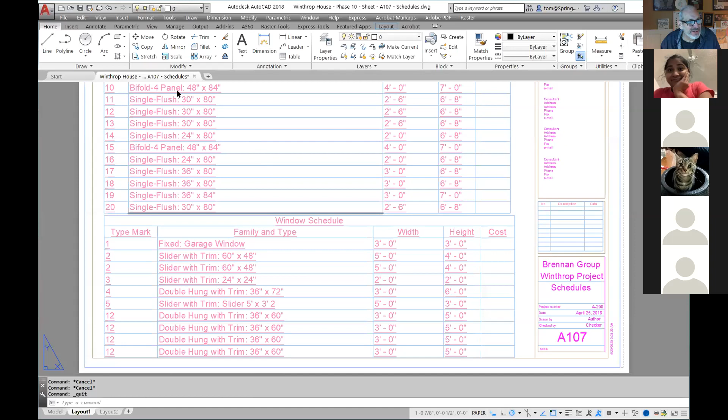Okay, all right, no. Okay, all right, go back to here, see what we got here. All right, so back out to here, see if I can't share the screen. And all right, I just closed AutoCAD, so I'm gonna have to open it all back up. So we're right back to where we started. All right, maybe we'll be able to open it from here. Let's try it again, file open.

All right, can you guys see this right now? Are you guys seeing this? You're sharing a screen right now. All right, okay. Ricky, can you see this right now? Yeah, I see the floor plan, the outside walls.

Okay, so let's just go over this real quickly here. So when you go into here, what's happening right now is you actually have what's called paper space. Paper space is identified by a couple things. First of all, you know you're in paper space. Now right here, this is your model, this is where we've been drawing everything, and over here is where you have your paper space elements. Now your paper space—Right, I was able to get that far. Right.

Okay, so as you work with this, right here it says 'paper' - that's how you know you're in paper space. When you're in paper space, that's where you put your title block information and anything that would actually be printed on a sheet of paper. This triangle right here is the other indicator that you're in paper space.

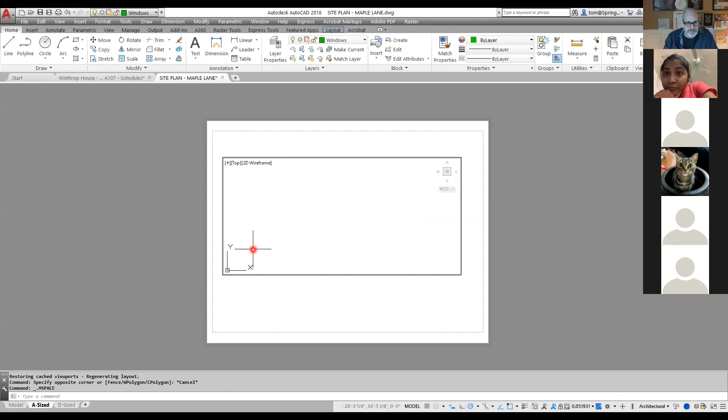Now, if I double click inside of here, I'm now in what we call model space, and it says 'model' right here. So now if I double click my wheel, it zooms in, because once I'm inside of here, I can just zoom it. I just double clicked my wheel and zoomed to extents, and I can continue to zoom inside of here. So all you have to do is just zoom it.

So you're saying once I get this blank paper here with the square, I double click the wheel, and it should put my drawing in there? Well, two things here - first of all, this is paper space out here. So what you're doing is you're going to put your title block on there, and to do that, you insert it.

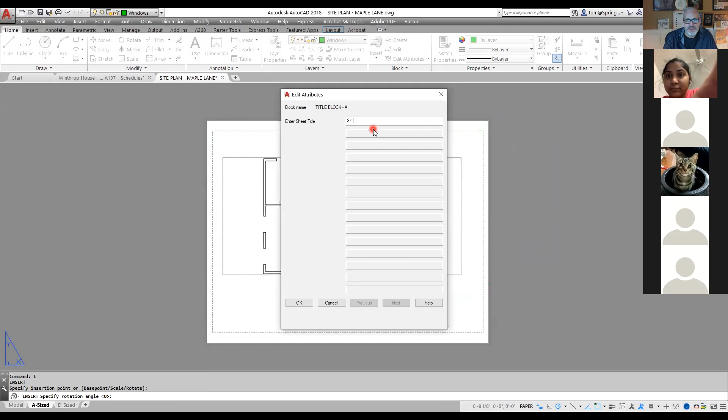So we go to insert - all this is on the video - we go to insert, and I go to title block A, hit OK, and bring this in. This is the title block, this is the information about what we just drew. So I typed in S-1, that is what that is, and it shows up right down there. So that is how a title block works with attributes.

So you got that. Now, if your information is not showing - in other words, if it's looking like this - you just double click inside of it with your wheel, and it's going to zoom you out to extents, and then you double click over here. So it's still there - if it's out here in the model, it's available on here. So that's all you have to do. Does that make sense?

I can try, yeah, just double clicking on the wheel and see if it puts it in there. Yep, yeah, you've got to make sure you're inside.

Now again, please watch what I'm doing here - okay, you can do this. If it says 'paper,' that means you're not inside of here, that means you're out here. If you double click inside here, now you're in the model - this tells you you're in the model. Once you're in the model, you just zoom to extents, you can zoom and pan inside of there. You see how that's different? So it's inside of there, and then you double click outside to go back. So you've got paper space and you've got model space.

All right, so give that a shot - if it's not there, I'll be able to double click and find it. Okay, all right, I'll try after class to see if I can get it. Yeah, yeah, that sounds good.

Okay, so what we did last week is we worked on this right here, and that worked out well. And so what we're going to work on next is going to be... let's see here. So we've got that there. Now that we have that, that gives us a basic idea.

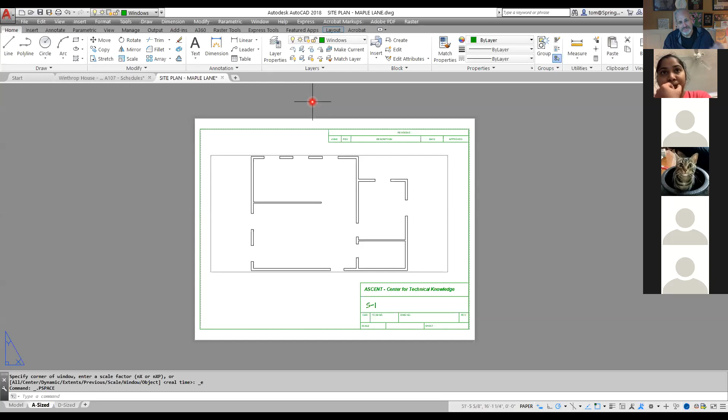Sometimes when we put the last block, which is the blue one, the scale - I have a problem with the scale because it shows so small. I tried not to make it bigger, but I couldn't do it. So we're talking about on the D size over here? Yeah, the blue one.

All right, then what you probably did, just guessing right now, is you inserted maybe this other title block. You got a title block A, a title block D, and these other small ones. So what you might have done is this. Is that what you maybe did? Or was it even smaller than that? Smaller than that, it's so small.

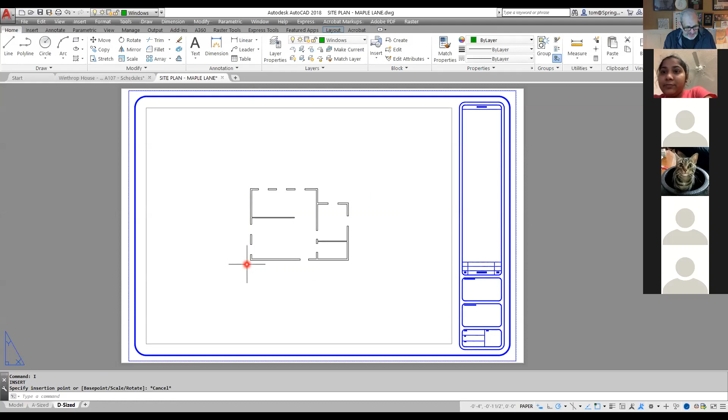Okay, well, without seeing it, I can't really tell. I just put the scale on and submitted it, maybe it was wrong a little bit. Just by what you're describing, I don't really understand what you're saying there. But I'd recommend going back over the video, which you probably already did. It looked like not too many people went into the videos. But if you went through it, it should explain exactly what you need to do.

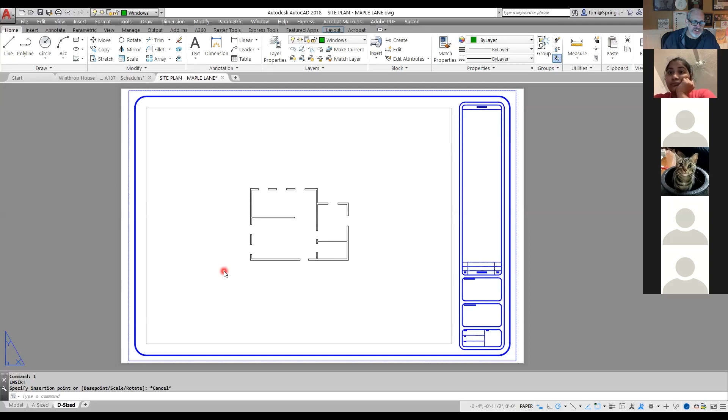Okay, so anyway, that's how these work right here. So when you're working and going to print something, this is how it works in AutoCAD. You've got your paper space environment, which is where you put your title block. And then inside here, this is your model space, which is where you see your information right there. So you've got those things.

And then we talked about actually making attributes and so forth, which I went over last week, which I'm not going to do right now, but that was the whole lesson of last week. So anyway, we will move on from there.

Any other questions? Oh, that one, just because I can't see your screen and it's really small, I don't really know. Are you saying that the title block itself is small, the blue is small, or the image inside of it is small? The blue title, like when I'm trying to insert the title.

Okay, so it'd be small, and then I got to scale it so I make it as big as that one. All right, it should come in at just its normal size. It doesn't come in at normal size on mine.

Yeah. Okay, I got a question, Mr. Brennan. Yeah.

What I'm looking at right now, after you get your text in here, is this going to save to that window? When you click on insert, it should show up in there, right? I'm just kind of wondering when I can upload this to make sure that I've completed the assignment. Okay, well, here's what you should have done.

This, and I don't have this completed, it should look like this when you're done, okay. And going over the sheet that I had, what you were supposed to do is this. Okay, this is what it's going to look like. First of all, we talked about having the thing.

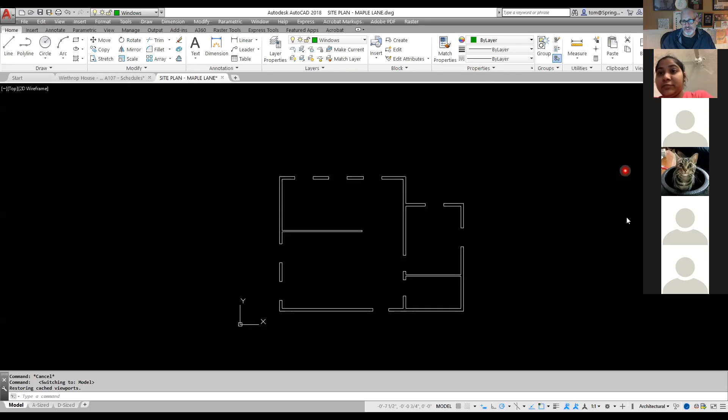Well, what we're going to do is what my goal last week was, to give you an introduction to what actually is happening when you work with title blocks. It looks like I didn't get that idea across very well, so I apologize for that. The last thing I want to do is make this confusing, especially with everything else going on right now.

Anyway, the goal was to create this sheet, and then when you see the title blocks, just go ahead and insert them and put information in them. It should have been pretty easy. I might have done too much, I might have tried to force you guys too much, I may have made a presumption upon your abilities. I didn't mean to do that.

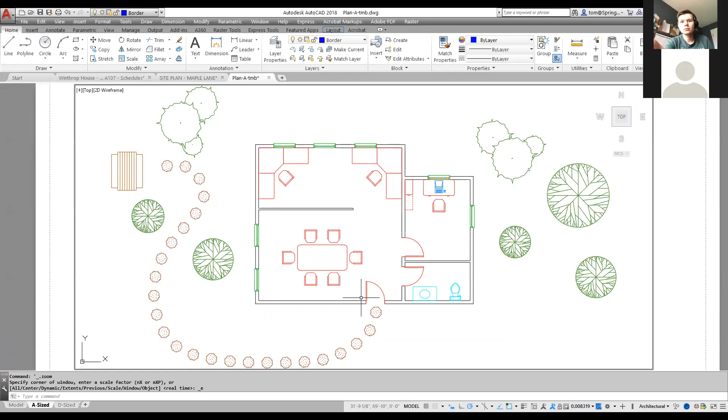Okay, but going back to here, can you guys see this right here? Yes. Okay, so this is what the drawing looked like. Then when I went to A size right here, if I go to here, now watch this. If this is really small, I double click inside here and double click my wheel, and basically it's going to zoom out.

So here, this is where you go back and forth between paper space. Right now, I'm in paper space. It says paper. Okay, let me ask you guys a question. Am I in paper space right now, or am I in model space? Paper. I'm in paper. That's right.

Right now, I double click here. Am I in paper space, or am I in model space? Model. Right. So in model, I double click inside here and it zooms me out, and I go back to paper. Now, at this point, I'm going to insert the title block that we talked about.

So I'm going to go to here, and grab this title block here. This is just going to be title block A, the one I provided for you guys. I'm going to drop it down here. So this is all you had to do: drop this, put it in there. It's going to ask you for sheet number, S-I, S-1, hit open, hit OK, boom, there you are.

So you got that right there. So that's what you have. That part was just something I kind of gave you to show you.

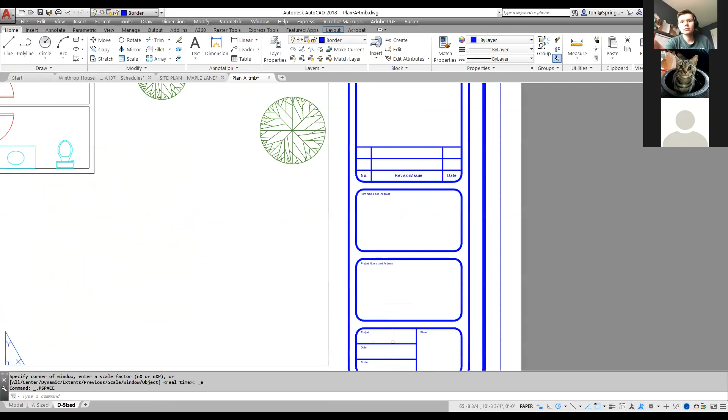Now, this D-size one, you're going to go here, and here we have the same issue. So we double click inside here, we double click our wheel, and then you see the information. Now over here, what we're missing right now is title block information. So we talked about how to make the title block.

I'm sorry. Do you have a question? We lost them. Okay, all right.

Okay, so right now what we got right here is I'm going to show you guys what we did. What we did is we made attributes. Now, to go over this again, to make attributes, you've got these different attributes right here.

But anyway, I'm going to go ahead and do this for you guys. So I go to here, we go back up here. We went to insert, and then we went to define attributes. So when you go to define attributes, I'm just going to go here and go sheet underscore number. And then the prompt is going to say sheet number. And then I hit okay, and I drop it down here.

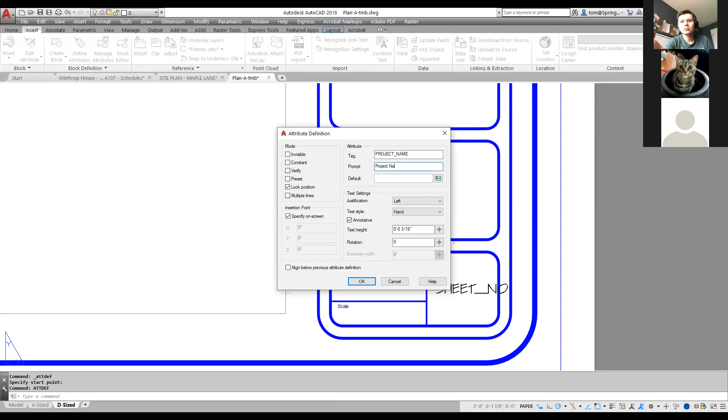So then I make another one. I right click, I go to repeat that. And this next one is actually going to be called, what's the next one? Project number? I think it's project name. Yeah, project name, okay, project underscore name. All right, thank you. And then I go to here and project name. Okay, and this is how we actually do things in the real world.

This is something that, if you get the hang of it, I don't think will be too hard for you guys. I know you've got other commitments, but if you just spend 15 or 20 minutes with this, it'll be very clear. It's not hard, you can figure this out. So what you're doing is basically supplying intelligence onto here.

Now I'm going to do the date. The date's going to look like this. I'll go to attribute definition again, and this one's going to be date. I'm going to make it capitalized, date, like that, and the prompt is going to say date. I hit OK, and I drop it in the date box. This is how you actually make title blocks.

If you know how to do this, life's going to be a lot easier for you. We'll do one more, and this one's going to say scale. So it's going to be scale, and then we go to the prompt and type S-C-A-L-E. I hit OK, and we drop it down here, boom, boom, boom, like that.

Okay, so now that I've got that, I'm going to save this all as a block. I type in B for block, and I'm going to save it as a block. What did I call it before?

I called it, oh, I don't know. I think I called it like D size title block. D, what did I call it? D? Okay, D, title block. What's that? Title block D. Thank you. Title block D. Yes, sir, okay, thank you so much.

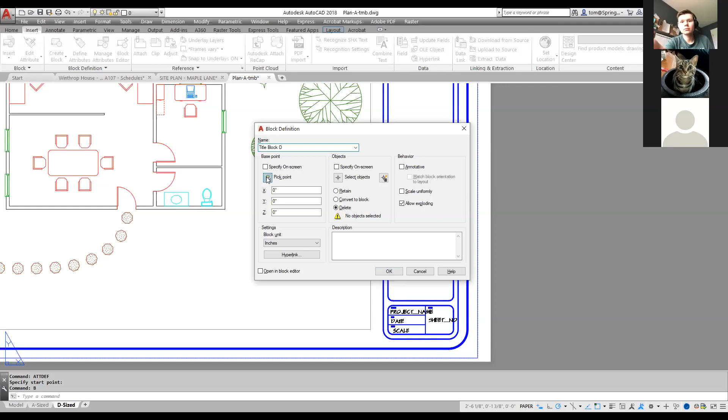Okay, and now I pick a point out here to grab everything, and it's going to be my lower left corner, like that. Then I'm going to go ahead and select my objects, which is going to be everything. Then I want to pick these in order: 1, 2, 3, 4. Hit my enter key.

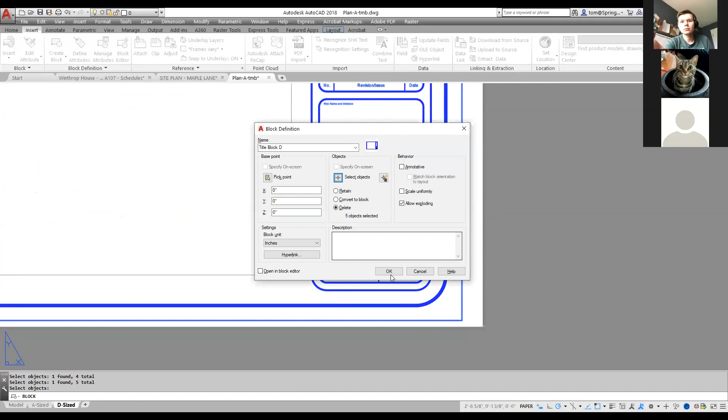I'm just going to go ahead and let that delete, and it goes ahead and does that. Now once it's done that, I'm going to insert it, just making sure I got the border to make it a little easier. I go to insert and I'm going to put in title block D. I hit OK, I bring it in, and I drop it right there. Then it asks me for the sheet number.

For the sheet number, I think I called it what, S1? Yes, S1, okay, thank you. Trying to remember what I did last week. Okay, S1, we'll go back down to here for sheet number, we'll put S1. And then the project name.

Site plan. And then the date is going to be, let's see, date is going to be 4/22... actually it's got to be 4/2020. And then scale, let's see what I said the scale was. I said 1/4 inch equals a foot, so I made 1/4 inch equal 1 foot. Okay, so I got that.

So once I've done that, boom, that is what your title block looks like, and that is what I wanted you guys to save and submit. That's all I wanted you guys to do. Now over here, inside here, you could also scale this, so it's also 1/4 inch equals a foot. When you've got that, it fits nicely and then you're good to go.

That is what you do. Those are the steps right there for putting together a title block, because we're going to be using this when we actually do our final submission. I just wanted to give you an introduction to title blocks, so that's kind of review. Now that we've done that, are there any other questions? I want to make sure it's clear. I realize we went through quite a bit last week, but the whole goal is just to understand how to get a title block into your drawing, how to deal with attributes, and how to make some attributes.

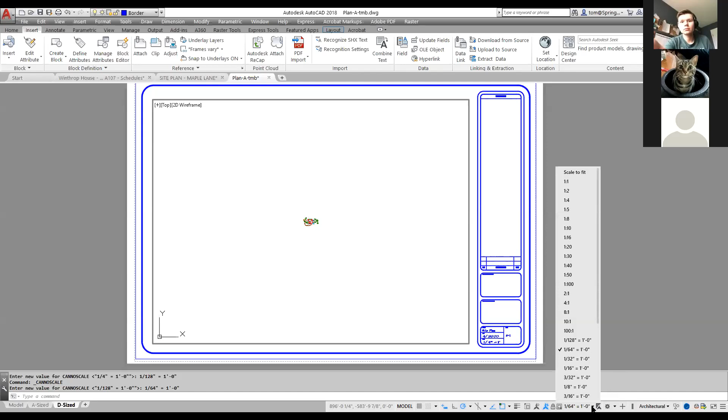Now check this out, Raphael, this is 1/64 inch equals a foot. It says so down here. So what you have to figure out is what looks best. If I use this scale, 1/128 of an inch, would you want to use that? No. Okay, would you want to use that? Yes. You'd want to use that? No, I wouldn't. If you handed that to a customer, would they want that? No. However, if I do this, I'm getting closer, I'm getting warmer. And then if I find the sweet spot, 1/4 inch, it's like, oh hey, that's looking great. And if I say I want to go a little bit bigger, see if it'll fit, well now look at that. That's a little too much because now I'm losing my information.

So I back it off, and the sweet spot is 1/4 inch. So the answer is trial and error. You're just going to work with the scale until you find the maximum size that will fit on your sheet that contains all the information you want. Does that make sense? That makes sense.

Now here's the other thing. Let's say I didn't really care about the trees. In that case, I could say I don't care about the trees, I'm just going to make it 3/8 of an inch, that's all I really care about. And then I could go here and say, turn off the stupid trees, I don't care. And then at that point, I can go over here and scale and move it over a little bit. So that's another approach. Now I'm showing more information scaled larger, I'm just not showing the trees. Does that make sense? Yes.

So that is the answer. The answer is you, as the tech, have to look at it and say, what does the customer have to see? And then you basically refine your information by layers and so forth. When you get it to the way you want it to be, then you maximize it so it fits on the sheet as large as you possibly can, so it gives them everything they want. Does that make sense? Yes. Okay, Mr. Brian?

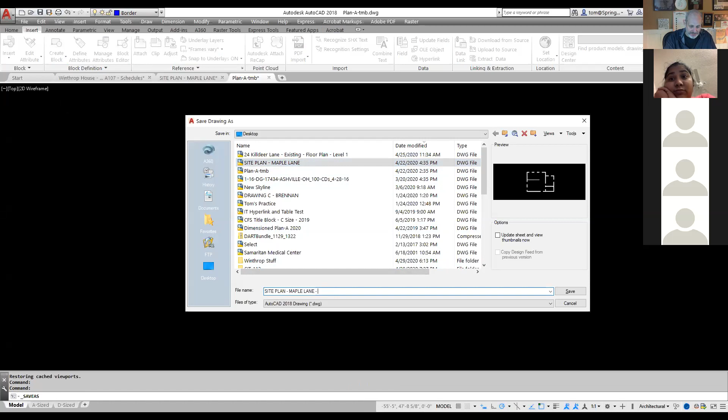I'm just going to go to the desktop. I've already got it here: Site Plan Maple Lane dash Brennan. How's that for a nice suburban name? So you've got Site Plan Maple Lane, and that's all you submit. Then when you submit it, I'll open this up and I'll know what you did.

See, it seems to me like, how are the two connected? Like they would have to be uploaded separately. No, it's all one model. It's all one thing. The model's here, and these are just layouts. These are representations for printing, like print previews.

Okay, so when I submit the drawing, those are going to be within the file? Yeah, you just gotta pull them up. Once they're in there, they're attached, so you can't get one without the other. If I get the drawing, I get the layouts too. All right, thank you.

Good, good questions, you guys are asking great questions. I obviously missed some things last week. Are there any other questions about this here?

No, I just got different questions. Is that the last class for us with you? I'm sorry, what? Is that the last class we're taking this week? He's asking if this is our last class today. Oh no, it's not, actually. I've got the schedule right here in front of me. Are you having the last class in any of your other classes? I do have 5 classes. I'm taking 5 classes this semester. Oh, 5 classes, okay. No, this is not the last class.

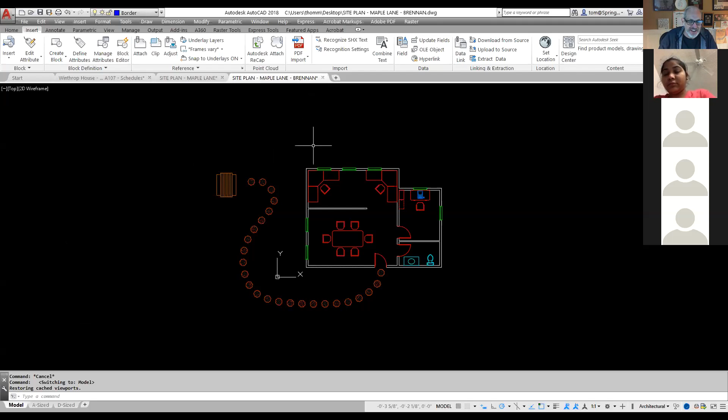What I want to do is, I don't want to grade 4 different elevations, so I'm going to show you guys how to combine your elevation drawings. We talked about the elevation drawings, and I'm going to go ahead and change my screen out here.

Let me do this real quickly. I'm going to stop sharing this for a minute, I need to grab something here, so I'll be right back. I got to just grab some other items here. I really need to do a better job of keeping my stuff more organized, but I'm doing the best I can.

All right, so we got this stuff here, and what we did, let's see, what do we got? All right, up to here, got this stuff here. All right, my goodness, that's not looking so good. All right, so what I need is the most recent custom garage project, let me find that. All right, see if I've got that here. Custom garage, there it is.

Yeah, all right, so the custom garage, we made the elevations. Let me find those real quickly here, just take me a second, there's a lot of content out here. All right, let's see. Okay, through 2020, and I don't see the custom garage. Let's take another look out there. Custom garage, is it on? Okay, so we're gonna do this.

We'll search out on the D drive. All right, let's just take a second. If I could, I would. Oh, there's the stuff I did for University of Connecticut. Yeah, one of my customers some years ago was University of Connecticut, I did a bunch of things for them too, facilities type stuff. So just looking for this right now. Yeah, just got to find this stuff for you guys here, it'll just take a second.

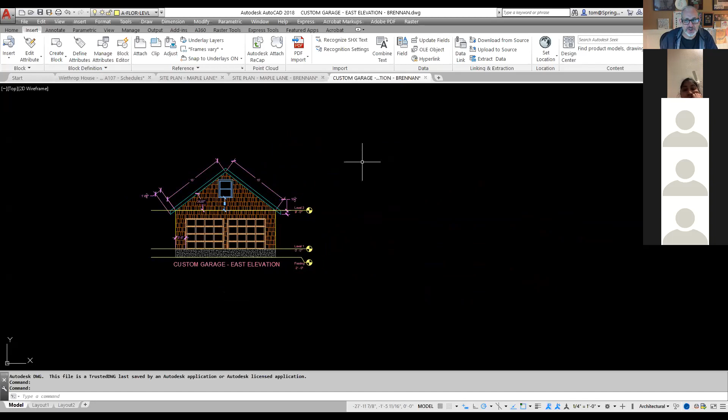Okay, what I'm going to have you guys do is this. Now, what I want you to do is put all these drawings into the same location, so that means this. You may want to jot this down, because I'm just going to explain how this works. You're going to open the east elevation, which is here, a drawing you already did. Now once you've done that, we're going to insert the other views into it, we're going to insert the other elevations into it. So let me show you how that works.

So to insert them, you can just type the letter I on your keyboard, and that brings up the insert command. We go to insert, now what I'm going to do is browse. When I browse out here, I want to find my other elevations. So the first thing I'm going to look for is my north or my south. So out here, I've got this custom garage stuff out here.

Should be here anyway, come on you, where's my custom garage stuff? Okay, don't see it, so let's see if it's somewhere else. All right, where is my custom garage stuff? All right.

Okay, not seeing it. Maybe it's in here. Okay, there it is, custom garage. So I got custom garage. Now what I got here is I got the east elevation. I've already got that in here.

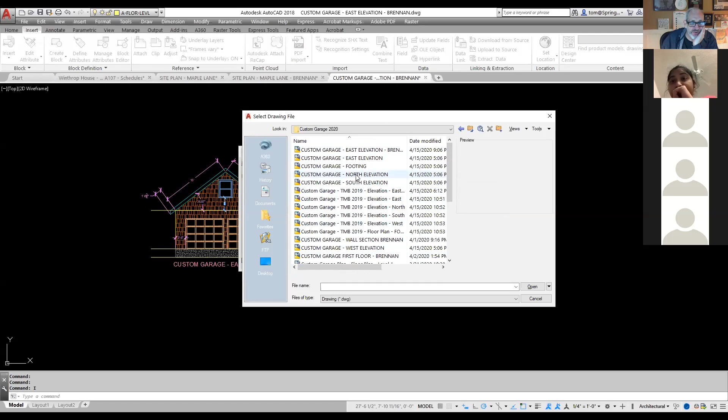I'm gonna go ahead and grab the custom garage north elevation. I'll grab north, and I'm gonna go ahead and hit open, and I'm gonna hit OK. And I'm gonna go ahead and insert it.

Now see this right here? I can go ahead and insert it right next to here, okay? So what I'm gonna do is I'm gonna grab it right here, and I'm gonna line it right up over here. Just gonna pull it over, and boom, drop it. And then I got it right there. So I've got custom garage north. So I got the east, and I've got the north.

So I'm gonna right click and go to insert again, or I could just go to I, and it brings up insert, and I'm gonna browse again. This time I'm gonna pull up the south elevation, and I'm gonna hit open, and I'm gonna hit OK.

And now I can go ahead and take this, and I can go ahead and pull this down in relation to this one. I'm gonna drop this one right here, okay, like that. And it asks me to rotate. I don't wanna rotate it, so I've got that.

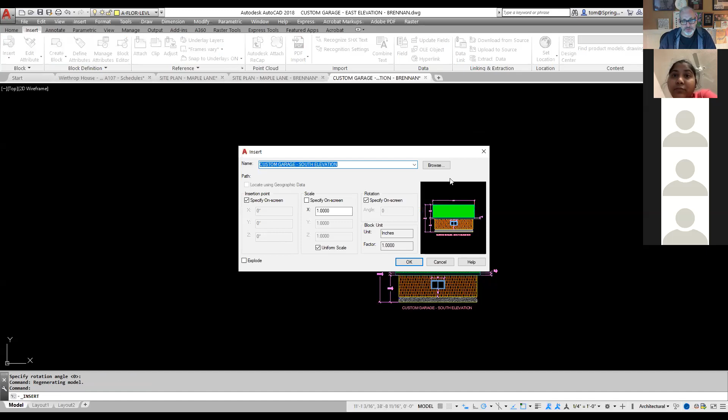And then the last thing I'm gonna do is I'm gonna right click, I'm gonna insert again. I can also go here to insert, and I can go ahead and go to browse, and I'm gonna put in now the west elevation. So the west elevation is here. I hit open, I hit OK, and I'm gonna drop it right down here. And that's what it should look like, okay?

Now when that's all done, what you're gonna do is you're gonna save it like this. You're gonna go to save as, and you're gonna call it custom garage elevations, elevations complete with your last name. And you're gonna go ahead and save it, and submit that. And that's what it's gonna look like. That's just gonna save me the hassle of having to go through 4 different files, okay?

Is that clear what we just did there? It is clear. I have a question. Okay, yeah, what's the question there, Raphael? What if I already submitted all of them?

That's okay, just submit it over again. I think everybody did. Just resubmit it. I've got a new link out there. I'll show you what the link looks like. So the link looks like this here.

I'm going to go out to here, and I'm going to go ahead and do this, and I'm going to share, if I can find this out here, if I can find, yeah, this is such a pain. Okay, let me go ahead and let me do this. Let me see if I can't get some more screens.

Okay, I've got to actually go out here and grab this. So let me close this. I'm going to go out to here, and looks like I closed out of that, so I've actually got to go out to Monroe Community College again. Okay, not that, Monroe Community College, not that. Okay, MONROE. Okay, out to here. And there we are, and I'm going to go ahead and grab this.

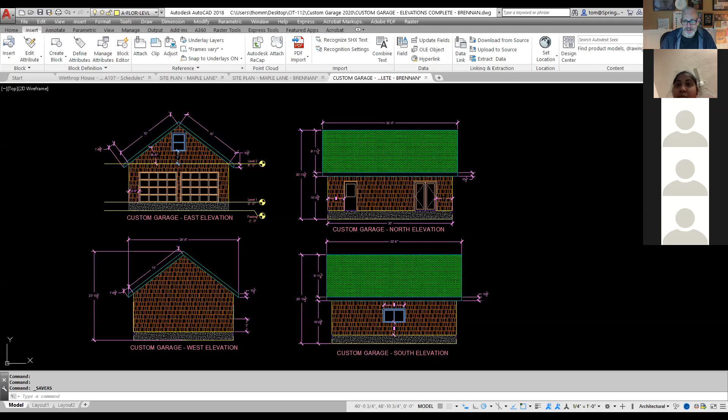Okay, yep, and I'm going to open this up. Can you guys see this right now? Can you guys see Blackboard? Yes. Yeah, okay. Now, this is all the stuff we did on April 15th, okay?

So I know you already submitted them, but what we did is I made a new one down here, and I called it Custom Garage All Elevations, all right? This is where you're going to upload that one. So you're going to take all of your elevations, put them in one drawing, and submit it. Should take you all of 2 minutes, okay? But I want you guys to do that.

Okay, so you're going to make a new one. Save it as Custom Garage, all elevations, dash your last name. So that's what you're going to do with that one. Is that clear? Yeah, okay, all right.

Okay, so then what you're going to do is getting back into this. We talked about this. Blackboard right here, we got the same thing. To submit it, you're going to submit it right here, site plan dash Maple Lane dash your name. If you're ever not sure what to name something, go to Blackboard and the name's going to be right there. So right here, site plan Maple Lane, this is where you submit it, and then you just put your name at the end. That shouldn't be mysterious.

Okay, I've also got out here a tutorial. Did you guys see the tutorial, any of you guys? I sent that to you, I sent you guys all the tutorial. I do this every week. When I get done with it, I put it out, I load it up to YouTube, I make a link to it, I send the link to you, and I put it on Blackboard. So really avail yourself of that. It would be good because it's good to have that. It's solid information, and it's just going to be useful for you to go over it. If you still have questions, of course, I want to answer them. But I do kind of expect you to use the tools that I'm giving to you.

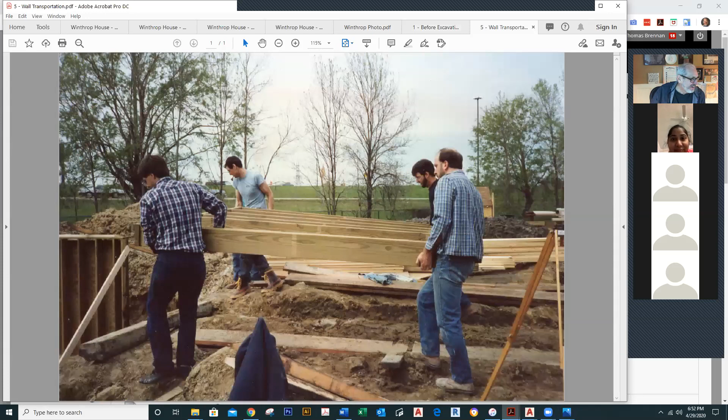Now the next thing is when you actually start to build this, we actually did this right here. Can you guys see this too? All right, what we're doing right there, this is actually me back here when I had significantly more hair and it was dark, and I had a pretty good build.

But anyway, back then we're actually hauling the walls. These walls actually went into the basement. It was a permanent wood foundation. Now, you've probably never heard of that, but a permanent wood foundation does not use concrete in the walls. It uses pressure-treated lumber, and essentially it's all wood. You have a cement cap poured, and then your walls go in there, and that's what we're actually doing there.

So we put that into there, and that's me and some of my buddies back then. Then we went ahead and placed them, putting them in here, and here's another shot of us actually putting them in right here, and then we're loading them in and bringing them down into the hole.

Now here's the next thing. As you begin to create this, we begin to do the excavation. The excavation comes in like this, where you actually dig the hole. So you dig the hole, and when you dig the hole, it looks like this.

That's my friend Bernie down there, who's actually doing most of the work, and that's me, and that's my oldest son John, who's an architect in Kansas City, and this guy is actually a videographer in Michigan, making the big bucks. You can see right here the soil - for those of you taking civil technology right now, you can see there's different characteristics of soil there, you can see the strata.

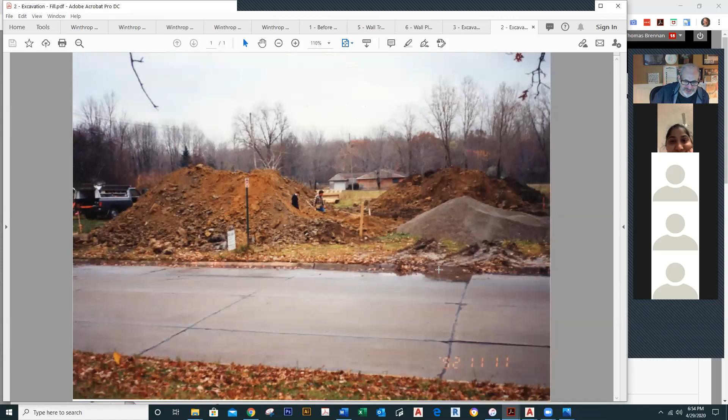Interesting. And over here is a bunch of fill. So we excavated that, and then we had a bunch of fill. That's all fill that we had available afterwards, and this is in November of 1992.

So then after that we started to build it, and part of the thing was we had to do what is called dewatering. So what we did right here is we began to do the dewatering, and you can see this pipe out here is actually draining it.

That's my son with the cowboy hat. That's my wife. That's my daughter. That's Bernie. And this is what that first floor looked like. This is in December of 1992. And we got that.

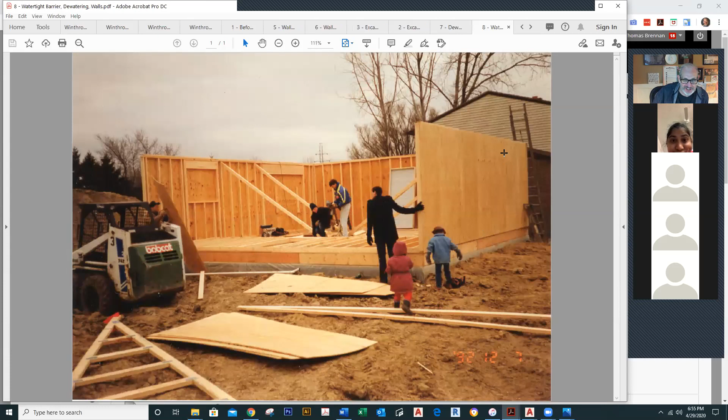And then we're going to move on to here real quickly. Over here you've got another view of this particular structure - it's kind of like a big cube. But we did this, and then it went up. Down here, we had that together. Then the next thing we had was the superstructure all together like this. And then after that, we actually had both stories up and so forth.

Just to give you an idea as far as that actually is what that looked like. So that's what we have done, and that's the exterior frame right like that. That's basically what it looked like, just to give you an idea as far as what you're drawing here. So anyway, we'll go ahead and depart from that, and we're going to move on to the next thing. So getting back over to this discussion, this is what we're going to make here.

So let me show you what we're going to draw. What we're going to draw is this right here. You got the Winthrop first floor plan. We're going to go ahead and download this, and this is a PDF that actually shows us this particular item right here.

So what I'm going to do is drop this up here real quick. I'm going to download that, and yes, I'm going to save it. What the heck? And we are then going to open it up so I can see it better. So here I have this right here, and I'm going to rotate this, and that's what it looks like.

Now, to explain what we got right here, just to make it clear, you've got over here, it is 23 feet by 24 feet. And then after that, you have some walls and some doors, and also some first floor plan. It was a very open first floor plan. So I've got all this together for you guys to put it in here, and all the information you need is in here. So essentially, this is the basics of what you're going to draw right here. This is how it's going to look when you're done.

So you're going to start by using a template. I've got a template there, and you guys are going to start by drawing this right now. So notice right here that you've got, looks like I might be missing a dimension.

Yeah, looks like I am. Okay, over here on the far left, yeah, that is supposed to be 24. Okay, that got cut off. But over here on the left, this actually is 24 feet long. Okay, that's supposed to be 24 feet long. I think I might have that someplace else, but in any case, the size of the garage is 23 feet by 24 feet. So anyway, that's essentially it.

Can you guys see this okay? Can you guys see this PDF? Yes. Okay, so that's what we're going to be drawing.

So now, getting into this right now, this is pretty straightforward. You guys have done a lot of floor plans. I'm just going to show you how to do this. Now, first of all, this floor plan is available. I just showed you. You can download it and print it, which I'd recommend that you do. And then you can go ahead and start to draw this.

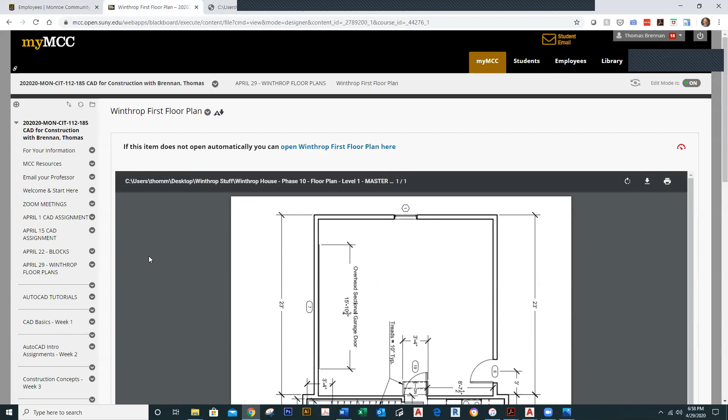Now, I'm going to go ahead and start to draw this for you. So I'm going to go into here, and go back over to here. And what I'm going to do is go to April 29 right here. And you guys can see Blackboard right now, correct? Yes. Okay, I'm going to download the template.

So I download the template by clicking here, and it's going to bring that in. And now I've got it right down here, Winthrop first floor. And I'm just going to go ahead and double click on it. And it's going to, oh, doesn't want to do it that way. So I'll hit that. I'm going to go ahead and open it from here. I'm going to go over here, and I've got all these things open.

I'm going to go here, and go to new. And it asks me for a template. And the template I'm going to use is the one I just downloaded. So I'm going to look at my downloads, or wherever you saved it. You just got to go find it, and you can find your downloads. And out here, I've got the Winthrop first floor. So I go to here. And guess what? There's nothing in there.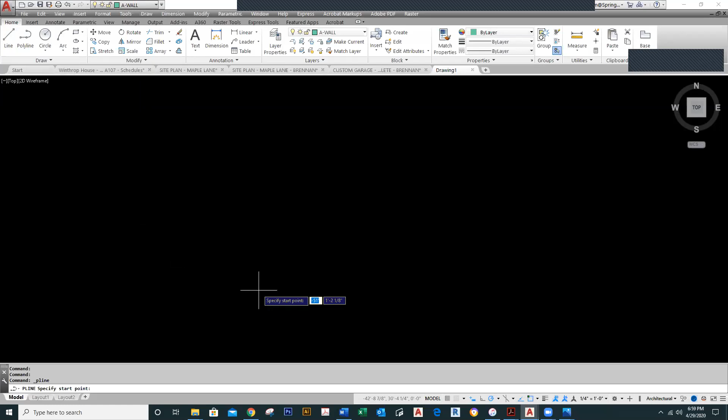So what I'm going to do right now is I'm on the wall layer, so I'm going to start it by doing this. I'm going to start by saying, okay, I said it was 27 feet by 27 feet, so I'll start with that. I'll go here and use a polyline. I'll start on this side. I'll go over 27 feet, 27 feet, boom, and then 27 feet.

Okay, and over here, 27 feet. And then if I wanted to complete this just like a cube, I could do that. All right, so I'll just go ahead and do that, and I've got the first part.

And then the other thing is, I'd said that the garage is 23 feet by 24, which means I've got to come down 18 inches here. So come down 18 inches. Then I'm going out this distance, 23 feet. And then I'm going to go down here 24 feet. And then I'm going to go back over here. Okay, so I've got that. All right, and I've got that in place right there.

So I've got these different items right here. So I got this one, I got that one. Now that I've got that, you can see I've got a foundation.

Okay, so I go back to here, and I'll see if I can still do this. Let me see if I can't make this work for you guys. Let me go over here. All right, we'll close out some of these. Okay, we don't want that.

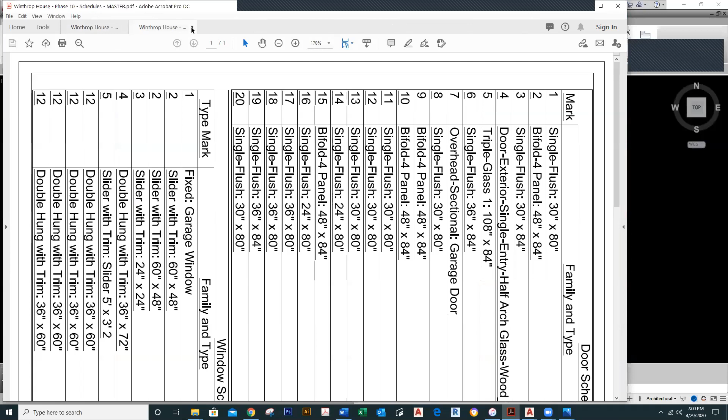Okay, come on. All right, so getting this, that's the basement. And then getting back over to here, I'm going to open this back up, Winthrop. Okay, all right, so we got this right here.

Okay, so getting back over to here, I'm going to go here. I'm going to, can you guys see this PDF right now? Yes. Okay, all right, so it's like this. Now, what we said was it was 27 feet by 27 feet. Okay, so 27 feet by 27 feet.

And then over here, it's 23 feet by 24. Please notice over here on this wall, it's 24 feet. You might want to write that down. The dimension got clipped off. Sorry about that. Okay, so once you got that, the walls here, I actually gave you another sheet that tells you the size of the walls.

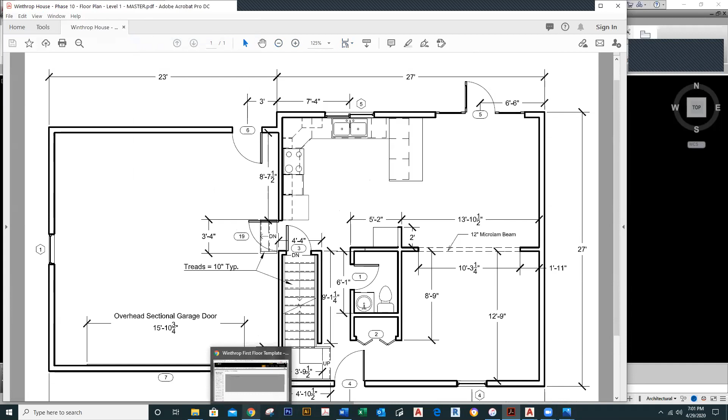And it's actually out here on Blackboard. Can you guys see Blackboard right now? Yes. Okay, yep. So over here to Blackboard, I'm going to go out here, and what I want to do...

Is I scroll down here, and you'll see I've got Winthrop project details right here. So I'm going to download that, and when I download that, it looks like this here. All right, so I've got this right here, and I'll go ahead and close there.

And the exterior and garage walls are 6.5 inches wide. So my exterior walls are 6.5 inches wide. Okay, so we'll go ahead and work on that. The interior walls are 4.5 inches wide, so we got that. So let me go ahead and I'm going to start that process right there.

Okay, now getting back over to here. Now this right here, this one wall over here is a little bit of a problem because this wall right here is actually only going to be, that's going to be an interior wall. So that is a little bit different. So I'm going to explode that.

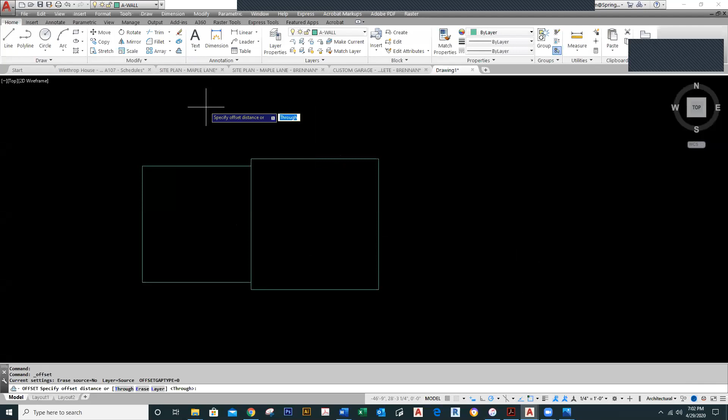And when I explode that, that will allow me to go ahead and do this with a little bit more accuracy. So then we talked about the offset command. The offset command allows me to make a copy of my walls a certain distance away. So my offset from exterior walls is going to be 6.5. All right, so now here I'm going to go ahead and offset these like this. All right, going to do that. And I'm going to do the same thing with my garage. Go here like that. Okay.

Now this wall right here, this one's got to be 4.5. So I'm going to offset this wall 4.5. So offset 4.5 like this. And I'll click it here. I'm going to offset that.

Now, once that's all done, I'm going to use my fillet command, and I'm just going to clean up these corners, clicking here and here. And this allows me to go through and to clean these all up. Okay, so I'm going to clean these up.

And a lot of this is stuff you guys are going to recognize. So I'm not going to necessarily beat this to death because I think a lot of this you guys are going to be able to figure out yourselves. But just to show you how the basics are like that.

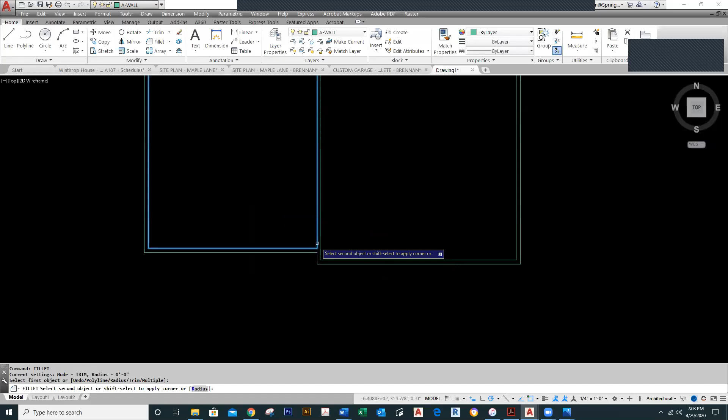And then I'm going to go to fillet and go to here, and then down to here, same thing, and then I'll repair that one thing down there because I lost a line. So I'll go ahead and go to my line command and go from here down to here, connecting it, and this is how you start.

So you start by doing this, and then to verify that you drew it correctly, you are going to put in your dimensions. Okay, so you're going to put in your dimensions. Okay, so you got that, and that is how we get started. Okay, so then I'm going to go to my dimensions layer, which is right here, A-ANNO-DIMS.

I'm going to throw in some dimensions and make sure I've got it right. There's 27 feet there, and I'm going to make sure it's right over here, 27 feet there. Okay, and then over here, this should be 23 feet. And over here, this should be 24 feet if I did it right. So drum roll, please. Is it? Boom, it is. Okay, so I've got that.

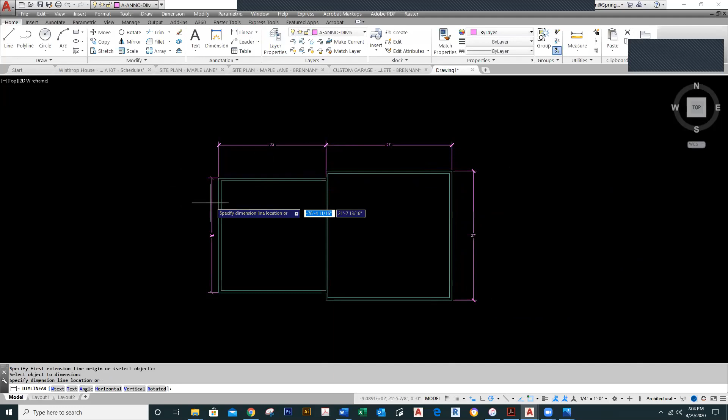Now that I've got a good foundation, I'll save it as Winthrop first floor. I'll go ahead and go to the desktop. I'm going to call it Winthrop first floor with my last name. Okay, Winthrop first floor, Brennan, like that. Okay, so now I've got that.

Now the rest of this, it gets you from here, you're going to start to continue drawing your walls. So I go to here and I can say, okay, let's keep on drawing walls. I like what I'm doing so far. Going back to here, I would then go back and say, okay, how am I doing with this other item showing up here? So let me go out to here.

And can I get, okay, right here. Can you guys see this PDF right now? Yes. Okay, so here's a couple things right now. I've got along with this, I've got my doors and I've got my windows and I got my walls. Now my walls right here, I've got this wall right here, which is actually set at 12'9" from the edge. So if I start from this corner, I can go 12'9" over, and then I go over 13 feet 10.5. So 12'9" by 13 feet 10.5.

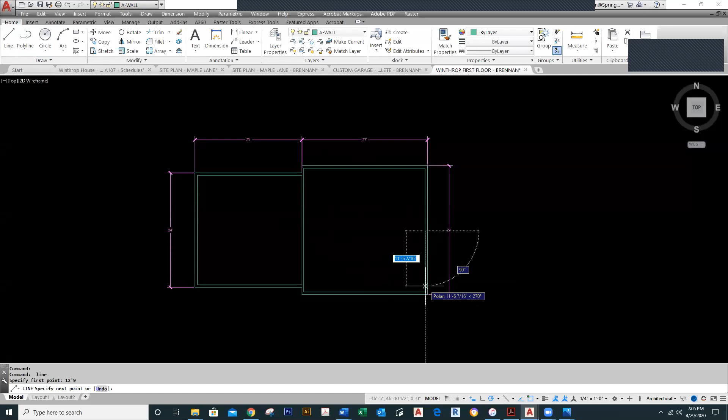Okay, so can you guys see AutoCAD right now? Yes. Okay, so I'm going to go from here. I'm going to touch it right here. I'm going to go up here in this direction. I'm going to go over 12'9", 12'9", and then I'm going to go over in this direction, 13 foot 10, 13 foot 10.5. Okay, I've got that. And so I've got that line right there.

And then once I've got that drawn, at that point I would then come back in this direction, 8'9". All right, 8'9". And this is all right on the plans right here. And so as I do this, I would then go over 5'2". Yeah, so I'd go over 5'2", and then I would go up this next distance, which is going to be, let's see here.

That would go up 8'9" plus 4.5, so that would be 9 feet, 1.5. Okay, so 9 feet, 1.5. Boom. And we're looking something like that. Okay, yeah, that's about right. And then at that point, we could just go ahead and pull this over like that.

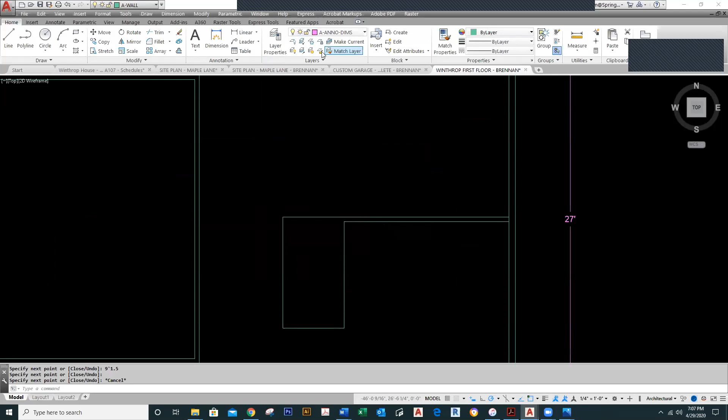Okay, so now at this point, you've got the basics. And then I could measure out and make sure that my wall actually is 4.5 inches, and hopefully it is. But let me check it just to verify, because I want to make sure I am doing this right. So that should be 4.5, and it is, so it's perfect. Okay, so that's the wall right there.

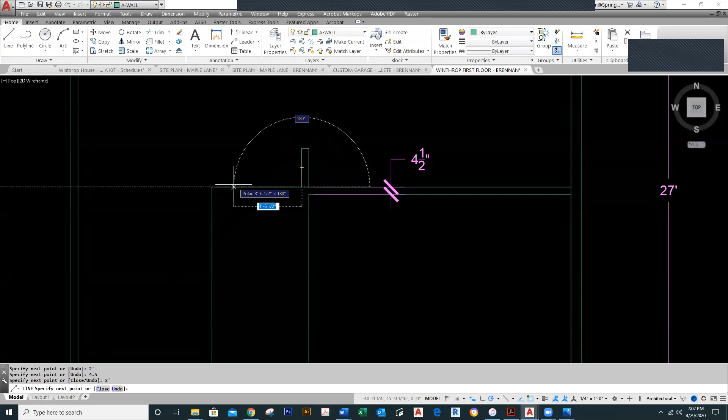That's 4.5 inches. And then I could go ahead and continue on from there by drawing some of my other elements here, going back over here to my wall. And this, as we continue on through here, this is something you guys have done before. Okay, so I'm going to go to here, and I'm going to go out here 2 feet. And then I'm going to go back over in this direction, 4.5 inches. Okay, and then back 2 feet. And that brings me right to that right there.

So I've got that, and that's the beginning stages right there. And then I could continue on through here, drawing my other lines and so forth. So you've got that. Okay, so I'm going to do one more thing here. I'm going to draw this line here, going over from here over to there. And then what I'm going to do is I'm going to offset those lines, each 4.5, just to give myself a good foundation as far as what I'm drawing here. Okay, and then as you go through here, boom, boom, boom, you like that. And then I've also got another wall 6'1" away.

So I'm going to line, and I'm going to go ahead and touch it here, and this goes up 6'1". Boom, and then I go over here in this direction like that. And then I offset that again, 4.5, and I go from here to there, and that gives me my closet.

Okay, so now that I've done that, the next thing I've got is doors, I've got other things. So those are the basic walls. There's not a lot of walls on this floor, okay, but I just threw those in there so you get the idea. Now, to put in blocks, we talked about blocks before.

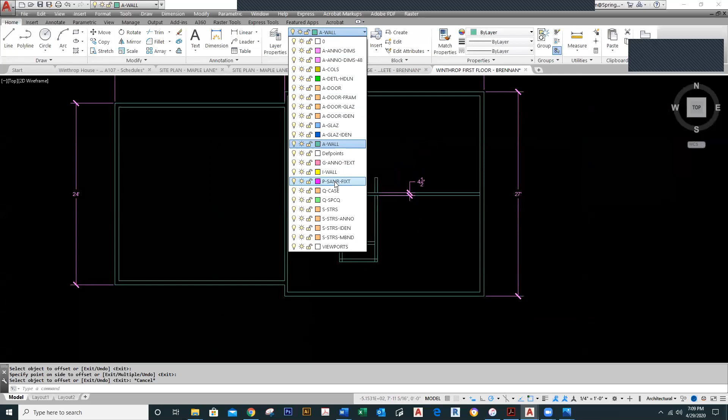Now, first of all, blocks, I want to put the blocks on the correct layer. So the layer for your plumbing fixtures is P sanitary fixture, okay, P sanitary fixture. So I'm going to grab that, I'm going to touch it, and I'm going to grab that.

Let me make sure I'm still recording. I sure hope I am. I think I am. Let's see here. Yes, I'm still recording. Beautiful, right there. Yes, I'm recording.

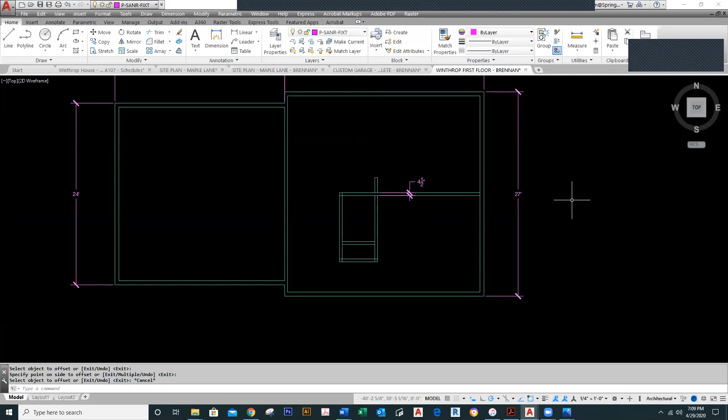Okay, so I've got that right there. And then what I'm going to do is, now that I've got the correct layer, I want to insert a block. Now, the easiest way, I'm old school, so I'm just going to type in I and hit my enter key. And what I'm going to do is I'm going to look for my toilet block, which is actually down here called a toilet. So I grab the toilet, I hit OK, and guess what I do?

I take it, and I'm going to drop it into my drawing, and I'm going to have to rotate it because it's not where I want it to be. So I'm going to go ahead and drop it there, and then I just move it into position. It's going to have to go something like this over here. I'm going to grab this and move it over, touch it here, and then slide it over a little bit like that, something like that.

Okay, and then I've got a vanity and a sink. I should have put them together, but I didn't. But I'm going to insert another one. And that's going to be a vanity with a sink. I don't think I put them together.

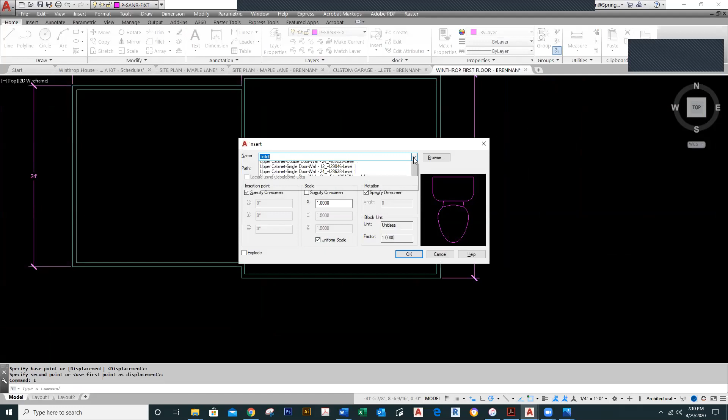Sink, vanity round, vanity cabinet, single door. Oh, you know what? I should have probably gotten rid of these. But that's okay, we can figure this out. I'm going to go ahead and I'm going to grab, yeah, I didn't do that. Okay, well, that's okay, we can go ahead and go to vanity cabinet, single door.

Okay, looks like there's a few of these here. Vanity cabinet, single door, I think it's going to be a 24-inch one. So I'm going to just grab this one. There's an 18 and a 24. I'm going to go ahead and grab this.

I'm going to go ahead and place this right here, and I'm just going to go ahead and drop it. And I'm going to have to rotate it afterwards, okay, so I'm going to rotate it. Then I'm going to put it up against the wall. And then I'm going to put a sink in there.

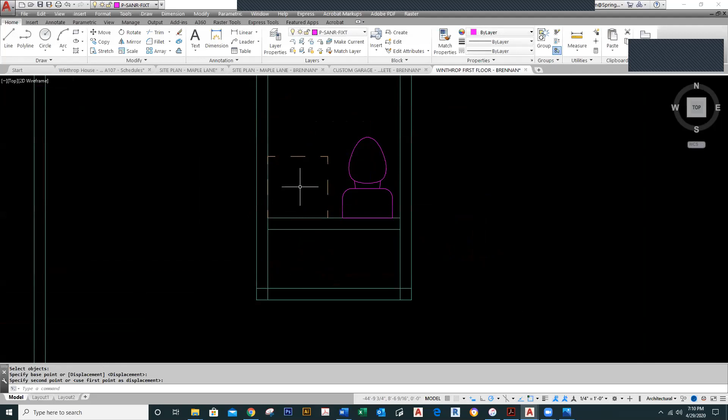Okay, so I'm going to go ahead and grab this and kind of tuck it in the corner here. That's what that looks like. And then I'm going to insert the sink, and this is actually the... let's see here, where's the sink? Sink vanity round. I'm going to go ahead and grab that and drop that in here.

And I'm going to go ahead and do this, and boom, we've got that. Okay, so that's essentially what you're going to do to put your different blocks in. That's how you insert blocks.

And then the same procedure is going to be going on with your doors. Now, which door goes where? Take a look over here with me. I'll go ahead and pull this up so you guys can see it. And what you're going to want to see right now is, can you guys see the white PDF right now? Hello? Yeah, okay, yes, all right.

So it's out here in the project details. Over here, I actually saved it as Winthrop Schedules. So I've got Winthrop Schedules, we're going to go ahead and open that. And here it is right here.

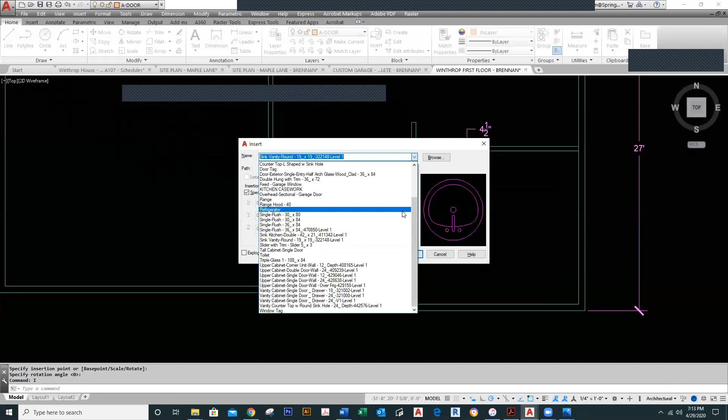Let's see if it's there. Hey, single flush 30 by 80. So I hit OK, I'm going to hit OK again. And guess what, I'm going to take it and drop it. This one has kind of an obnoxious location, but that's okay. I'll take it and drop it, and then I'll just move it.

So it's like that. Now how close am I? Well, it's got to be rotated around a little bit because it's not where it should be, but it is the right one. So what I'll have to do then—looks like that's rotated. Okay yeah, that went in the wrong direction. So I'm going to have to do a couple things right here.

I'm going to have to mirror it, to actually get it to be the other direction. So I'll go like this, and we'll go ahead and do this. And yes, okay, so I've got that.

And then what I want to do is mirror it one more time. So I'm going to use my mirror command again, and flip it over from this direction. Am I? Okay, I'm going to mirror it, like this, and mirror it like that. And yes, I want to do that. So now I've got this, and I just mirrored it a couple times.

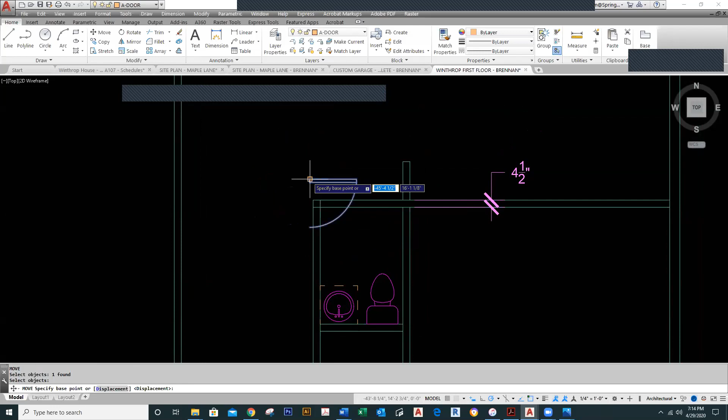Now, if I didn't give you guys a dimension as far as where the door should be placed, it can be placed essentially visually. So in this particular case, you just want to place it right here, so it's on the wall. If I didn't give you a dimension, then I'm not worried about it. So you've got this right here.

And then what you would do is continue with the walls. You go with the wall, and you would go ahead and make the breaks in the wall like this, here and here. And then what you do is you trim that out—so we go to trim, and go ahead and go to here.

And I'm going to go ahead and get rid of this and get rid of that. Looks like some of this actually went back a little too far, but that's okay, we'll go ahead and pull that back. So what you're going to do here is you're going to do that, and now you have a bathroom that's complete right there.

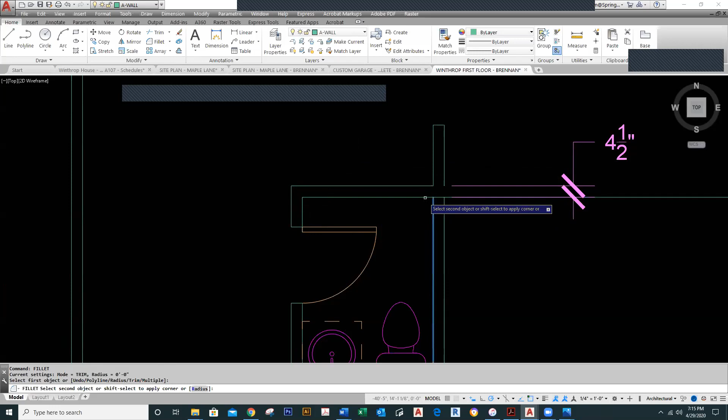And then we talked about using the fillet command to clean up the walls, you can do that. Now, everything I'm doing right here, none of this has to be done if you use Revit, okay? It doesn't have to be done. But nevertheless, I'll just say that to whet your appetites for another day when you guys can do that. So I'm going to go for my line command here.

I'm going to go ahead and take this and drag this over to here. And we'll go ahead and do that. Okay, so that is essentially how you put that together.

Now, the door schedule is what you're going to use to place all the rest of the doors. There's another door here I want to point out, just so you're clear about it. It's actually considered door number 5. So going back to here, let me see if I can find that. Let me get rid of this.

Okay, here we are. Now back over here, can you guys see this PDF right now, this white PDF? Okay, so right up here you've got door number 5, and it's 6'6" away from its center. So door number 5.

So let me see what door number 5 looks like. Where do I find that? Well, I look at my schedule. Door number 5 is triple glass 1, 108 inches by 84, triple glass 1. So I'll remember that, go back to here, and I'm going to go ahead and grab triple glass 1. I'm going to change. Okay.

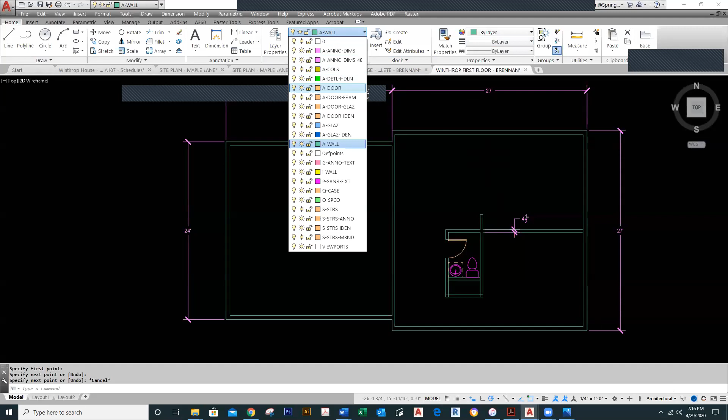And we will continue on here. Very good. Okay, so what we're going to do now is I'm going to go ahead and insert that. So I'm going to change my layer over here to door, and then I'm going to type in I for insert, and find that door, which is triple glass right there. I go to triple glass, hit OK, and here we are, looking good.

So I'm just going to place this. Now you're going to notice it's got to be kind of halfway in here. So I'm just going to drop it right there, and we'll go ahead and spin it around, and then I'll place where it's got to be. So it's kind of acted up on me, but that's okay. We can place it where it needs to go.

So we got that, and then what I'm going to do is move it over. So I'm going to go from this location here and place it somewhere right along here, and drop it right there. Now, what is my location supposed to be? My location is supposed to be 6'6". So I'm just going to give myself a marker.

I'm going to go here, over 6'6", 6'6", and then I'm going to use that marker to move it. So I'm going to move it from here. Okay, and I want to use the center point of this door as best as I can, which is not necessarily there, but I want to definitely use the center point. Looks like I'm pretty close to it right there.

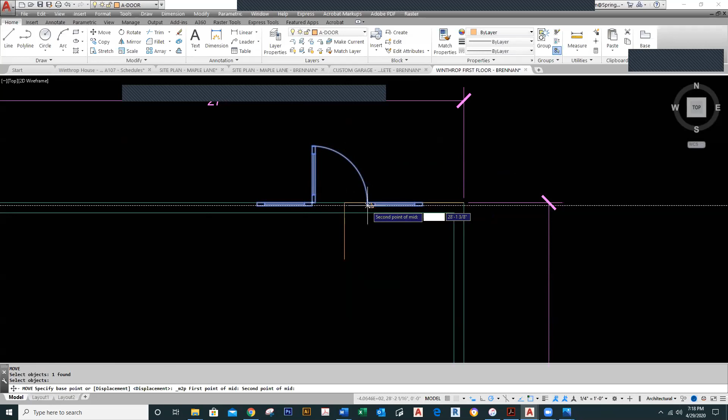Let's see here. All right, let's see here. I can move this, but it doesn't have a good snap, okay, so I'm going to do this. I'm going to use mid between 2 points, using this and this, if that'll let me. Okay, I'm going to drop it right there. And when I do that, boom, that's what we have.

All right, and then I get rid of these lines. Okay, so what you're going to do there is place that. Now, if I did that correctly, and I think I did, that's going to be 6'6" away from the edge, and I'll fix the walls and stuff like that. But let me put in a dimension to make sure we're where we should be.

So I'm going to go to here, and that should be, come on, hopefully it's not giving me the midpoint. Okay, which is not there, unfortunately. But that's close, isn't it? Let's see here. Is that the midpoint? It's the midpoint of that, but I don't think it's the midpoint of the wall.

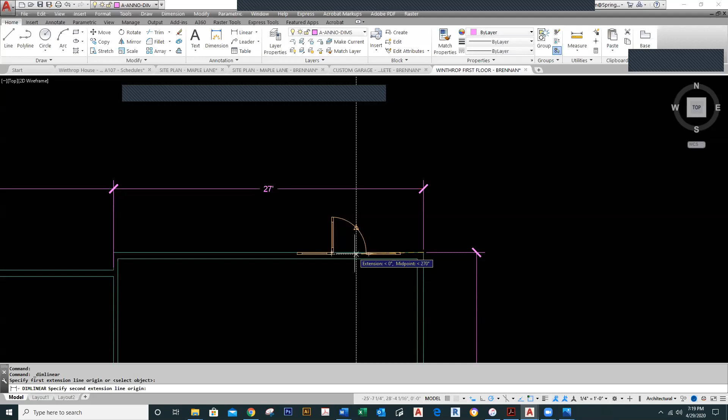Let's see. Okay, well, what I'm going to do is go ahead and use mid between 2 points. Great little tool, and this will allow me to pick a point here and a point here and actually put it right where it should be. So that's where I want it to be, boom. And that's 6'6", so I've got that. Okay, so then when I've got that in place, I will continue to use that as we move along there.

So that's something we got there. And then what I would do is fix the walls as I go along here. Again, this is stuff Revit does automatically, but you have to do this manually because we're using an AutoCAD drawing.

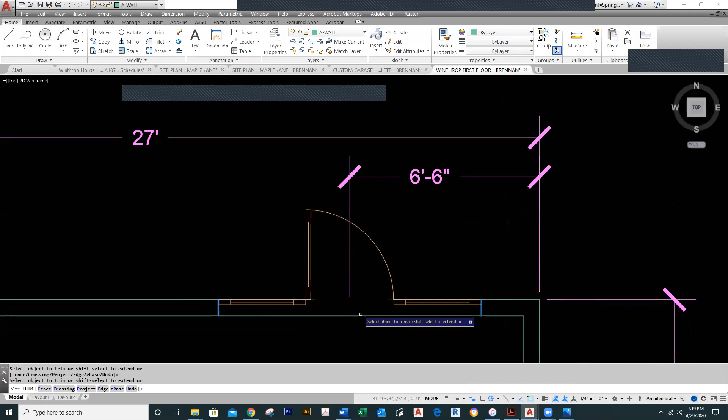You can see there's a lot of getting the thing in place and jostling it around, and it's stuff you can do. It just takes time. As you go through here, you'll be making progress, and that's what it's going to look like when you're done, 6'6" like that. That's what you have.

Now the last thing you're going to do is put in door tags. The door tags are up here—you've got a door ident. I'm going to insert a door tag in both of these. The door tag looks like this. I've got a door tag, I'll hit OK, and I've got a little attribute on here.

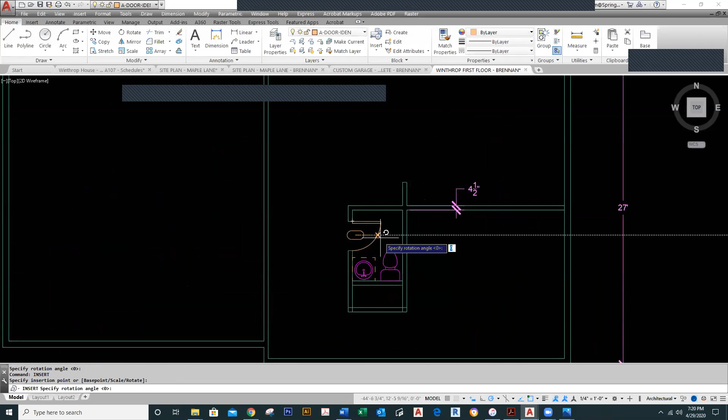I'm going to drop this here and call this one. Drop it there, and it asks me for a number—this one's 5. I hit OK, and it does that automatically. This is actually how we track things in AutoCAD. I'll go back here, drop this, and that one's going to be number 1, hit OK. So that's how you would put in doors.

The same is true for windows, but that's how we go ahead and begin to place this all together. So right now I've made a pretty good dent in it. Let me show you one other thing.

I did a lot of work for you guys because I care, and I put together a block here with all the kitchen stuff. It's going to go on the Q-case layer, called kitchen casework. I'll go ahead and dump this right in the corner. Boom—and look at all that came in: the kitchen sink, the range, the refrigerator. All that is done for you. Remember that, I did that for you.

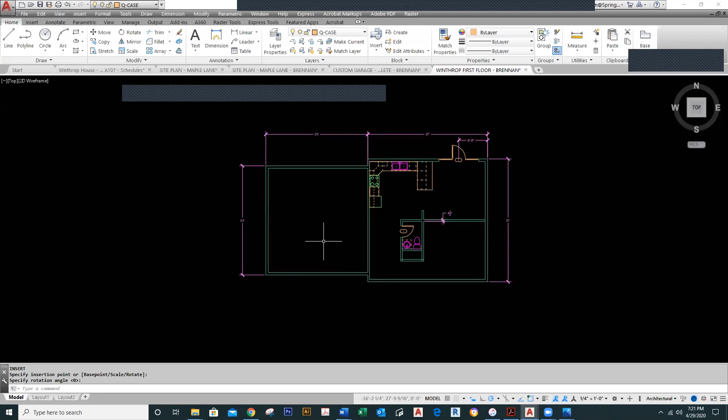That's all there. That's one of the things you got, and then you've got a few other things over here—an overhead sectional garage door. Again, you can find that when you look at the schedule, and you also have a front door and so forth, and then you also have some stairs.

Notice with the stairs, I put them in with a notation that says the treads are 10 inches typical. That's pretty normal. Right here, treads are 10-inch typical, meaning the lines that make up the actual stairs are 10 inches apart. It's true over here, and it's true for the garage—you're going to be using that.

And then the little stringers on the side are approximately 2 inches—I didn't measure those out, but that's what you have. They're 3 foot 4 inches wide. That's how we go about putting this in.

These two circles down here at the bottom, I'm not worried about those—don't worry about putting those in. Those are something we don't necessarily need to work on, so don't worry about these. But everything else I want placed in the way it should be—doors, windows, toilet fixtures, this huge block you just place in there.

And the rest of this really is going to go pretty quickly as you get into it. I'm going to go ahead and just drop in a window to show you how that works, and then I might let you guys go.

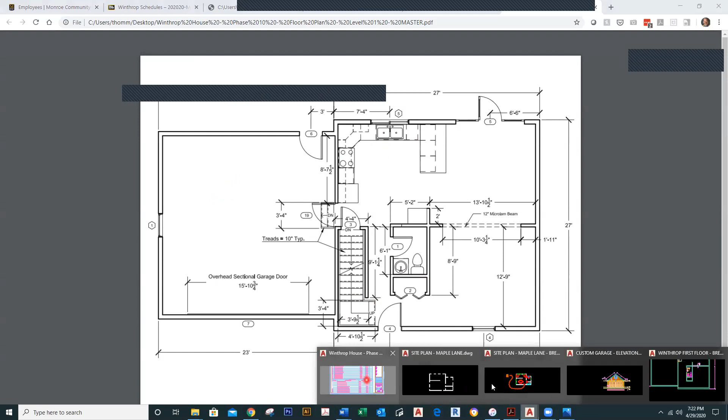Okay, so we're going to go back to here, and I'm going to go over here, to this. So what I'm going to do now is put in a window. To do that, I go here and change the layer to glass. I talked about this before, but whenever you see glass or glazing, it means a window.

So I'm going to go ahead and put in my window. The window for this one, I've already looked it up, is a double hung with trim, 36 by 72. I'm going to hit OK.

I'm going to take that and drop it. I'll go ahead and bring it right along here, and drop it right there.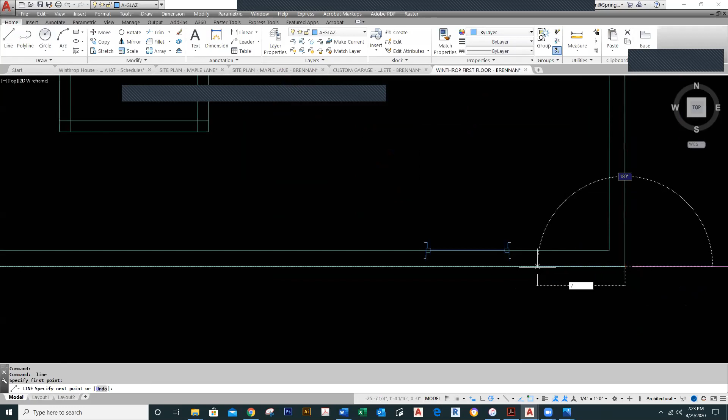Now at that point it's showing up right there, but that's okay, I can move it. I'm going to make a line going from here, 7 foot 4, 7 foot 4, just to give myself a marker. That's the line I'm going to go to.

So I'm going to move it right now like this, touch this from its midpoint, drop it right there, and then move it down so it actually snaps onto the wall like that. And boom, that's now in place.

Okay, so I've got that, and that looks great. So a lot of this is just finding these different items and placing them as we should.

Let me throw a dimension on there, make sure that it actually works, and make sure that it is indeed what it should be, which is here to here, and it should be 7 foot 4. And boom, it is.

So that is how you're going to do that, how you're going to make this work, and that's how each of these windows and doors are going to go in. Alright, so that is it right there.

Now the second floor and the basement are essentially the same thing. You're going to be doing the same thing for each one of these, and that is essentially how that would work.

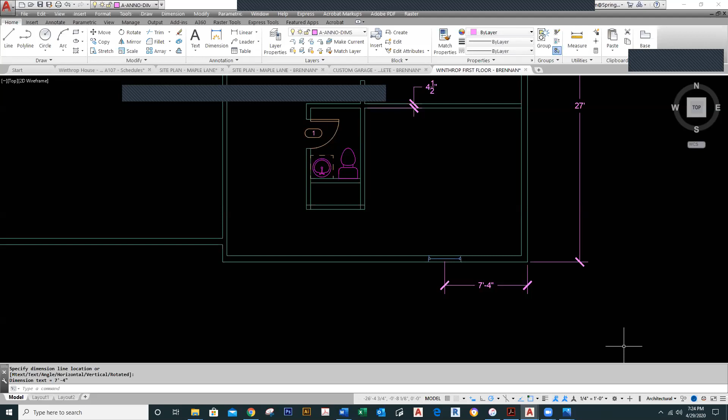So before I move on to anything else right here, is this making some sense? Is there any questions about how this would work? Any particular questions? We've done all this before, so.

Yeah, you have. The only thing I'll warn you about is with these doors right here, it might be tricky finding a midpoint, but I'm going to show you a little secret right here. When you want to move one of these doors to one of these lines, I'll just go ahead and do this kind of randomly so you guys get the idea.

And yeah, you're totally right, you guys have done this before. But if I want to put in the front door, which is number 4 right here, I'm going to go over here, let me see, and I'm going to go over to this, and I've got this number 4.

So which one is that? I go ahead and take a look here. Number 4 is door exterior single entry, half arch glass wood, 36 by 84. So, door exterior single entry.

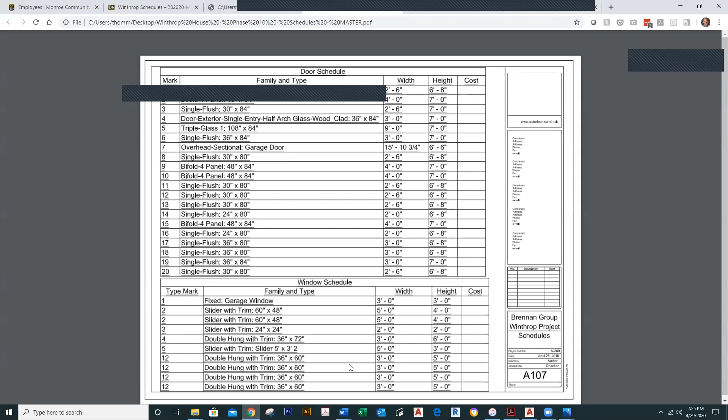So I'm going to go back to here and insert that one, door exterior single entry. I'm going to change this right here and insert that. Door exterior single entry, okay, this is it right here. I'm going to click on OK.

Now you'll notice it's coming from the halfway point, so I'm going to touch it here and drag it over. Now this one is actually pretty easy, so I'm dragging it from the edge.

I'm going to go over 7 foot 4, so 7 foot 4, and that one goes right in there. Then I can go ahead and drop it, and we are good to go.

And I'm going to have to flip it, won't I? Yeah, I will have to flip it. So I'll go like that, and then I just have to move it so that it actually aligns properly with the outside there.

So I've got that, and then what I would do is do the same thing I've been doing all along here, going through here. You may have to do a little bit of work with these, but hey, that's the nature of this whole thing. You want to get that, yeah. Is there a way? I wish there was. Okay, there's not really one, so let me go like this.

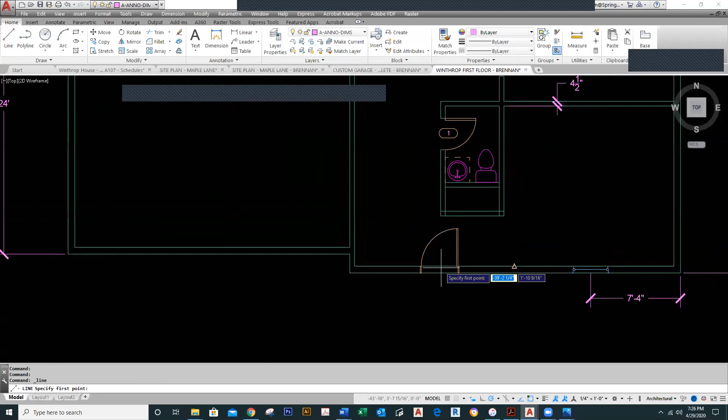Okay, there's the grip right there. So I'm going to draw a line from that grip. Let me do it so we can do this to the insert.

Insertion point right there. That's the insertion point. So I'm going from there on down. Okay, that's my insertion point. And then I'm going to put this in, make sure it's right. This should also be 7'4", and it is. So the same thing's true over this one. When you click on it, it shows you the insertion point right there.

If you want to draw a line to the insertion point, you start the line command, and then shift right mouse click and choose insert. When you do that, I can go here, and it actually allows me to draw a line to that insert. That's something you can do to make life easier for yourself to align things. That's actually an important concept. Now let me do it in slow motion.

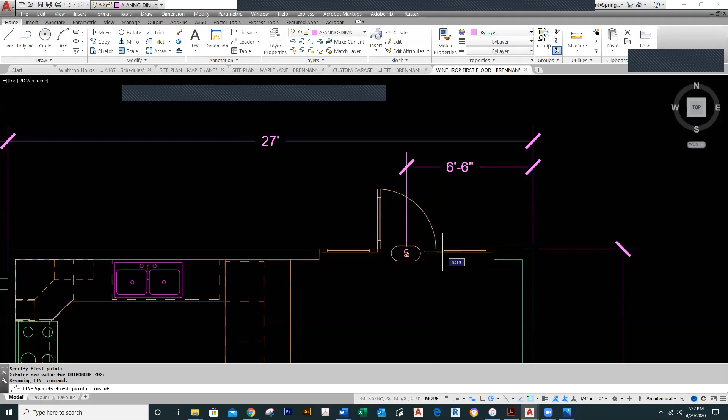Okay, so I want a line from the center of this right here. To do that, I start the line command. Now I'm in the line command, and I hold my shift key down and right mouse click. Shift right mouse click, and I choose insert. When I do that, it's going to find the insertion point, which is going to be the center of this door. So I touch it, and you notice a marker shows up. See that marker right next to 5? It's right there. It's going to click right there and pull it right down. That is the actual center point of that door. That is how to align these things and make it work.

All right, so that is pretty much it. That's the first floor. And then you've got the second floor, and then you've got the basement. They're all pretty much the same. I don't think there's any gotchas. They're all pretty much there.

The only thing I'll say is that on the second floor, I did the same thing for you guys, where I gave you a couple of blocks, and I'll show you what they do so you're clear. Going back over here, I'm going to go to the April 29, and with the second floor, I'm going to download this template. The template just came down here. I'm going to show you what I gave you because I want you to use it.

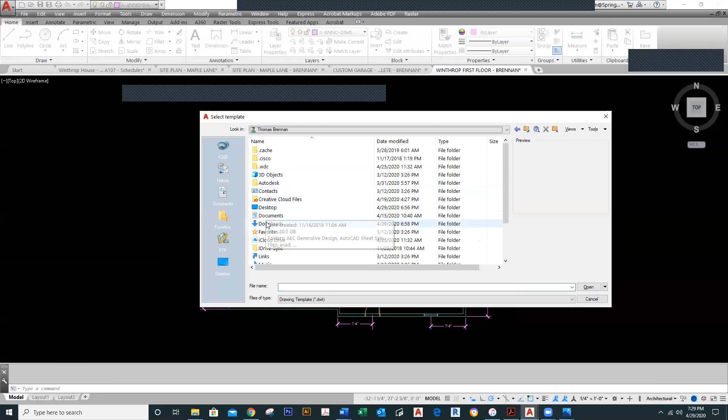So I'm going to start a new file, new, and go out to where my template went, which is going to be out here in my downloads. And there it is, Winthrop second floor.

Now with this one right here, I'm going to do the same thing. It's 27 feet by 27 feet. I'll just do this real quickly. 27 feet, comma 27 feet, boom, and then I'm going to offset that my distance, which is 6.5, boom, and that gives me a starting point, boom, boom, like that. And then just to be consistent, I'll put a couple dimensions on there so you guys are clear about it. Going to here and like that, and then over here do the same thing, and this should be 27 by 27, and it is 27 by 27.

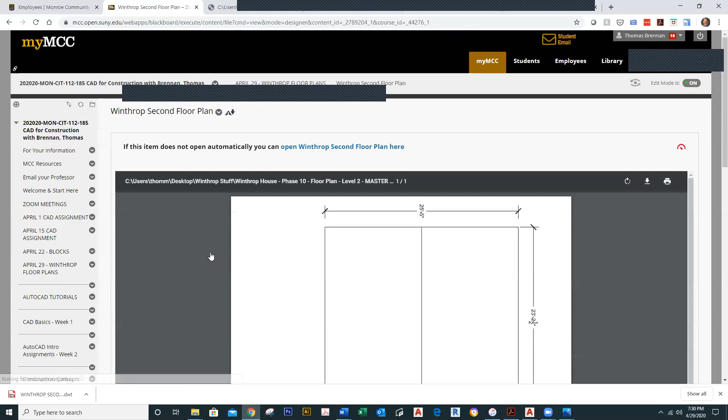And then I want to show you the blocks I made for you. I made you a couple of blocks, okay? Because if you take a look at the second floor here, you're going to see there is some content that's actually very valuable, okay? So it's a second floor plan, and when I go out here, I'm going to download it. When I download it, it comes down to here, and I'm going to save it. I'm going to open it up. And when it opens up right here, I'm going to take a look at it and go ahead and rotate this thing around.

Okay, and 1, 2, 3. All right, now you're going to notice that right here, let me move this out of the way here. Okay, down to here.

Now, what's going on here is I have this cluster of information - this is my main bath vanity and this is my master bath vanity. So I made those for you, and I made them into blocks, because I care and I wanted to make life a little easier for you.

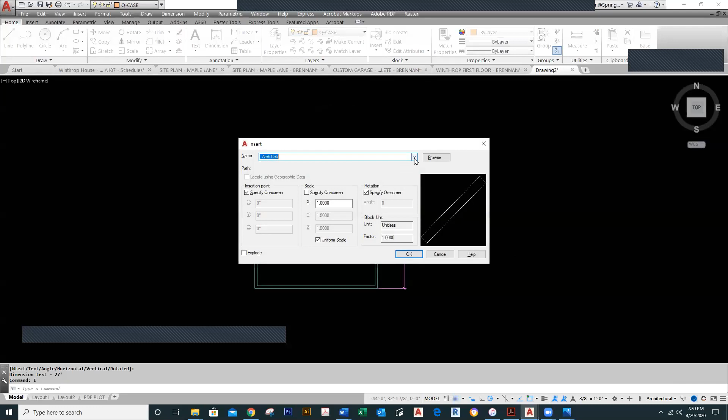So I went here, and I'm going to put this onto Qcase. I'm going to go to insert, and I've got this right here, which is main bathroom casework. Boom, you drop that in there, and that's your main bathroom casework - it goes right in the corner, and that's your sink and everything involved right there.

Then the next thing you've got is master bathroom sink. I've got this right here, I'm going to hit OK, and this one goes in the corner there. So those two items are just going to be tucked right into the corners, just like you see here.

And your stairs are going to go in the same way - they're 10 inches. I think I've got pretty much all the dimensions I need there. The only thing about the dimensions here, the stairwell - if you don't see the dimension on one floor, check the next floor. For instance, the width of those stairs, I've actually got that - it's 4'4" going up the stairs.

And then the actual staircase is 3'4" - that's the actual size, the actual width of the stairs. So 3'4" is going to be the consistent length. As you begin to draw this, you'll see that right there is 3'4" as well, and the stairs are 10 inches apart. I'm not terribly worried about the stairs - just get them consistent with the lower floor, and use the dimensions from the first floor as you need to make them fit in there.

All right, and that's it. Any areas that are not marked are going to center. For instance, this window right here is in the center, and this peak right here, which is the peak of the garage, is centered. That's how that would work, and you'll notice the dimensions are slightly different because it's centered.

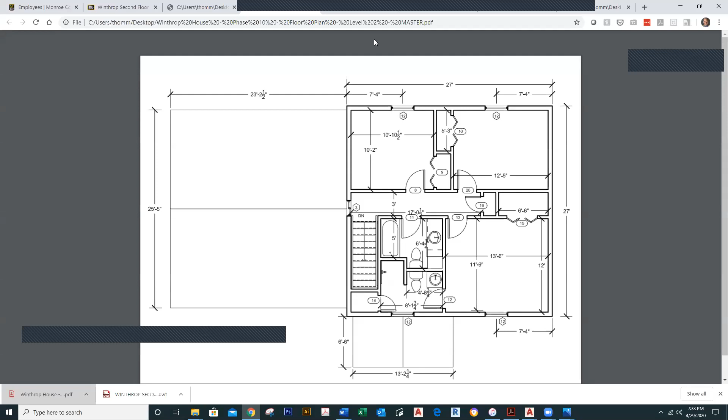And then you're going to draw these, which is the first floor, the second floor, and there is a basement. The basement's actually quite simple, but I'll show it to you so you understand it. The basement looks like this - I'm going to go there, and it's in green. I have a template for each one.

Over here, I'm going to go ahead and do this and flip it. And you got this - this is the basement. I got the overall dimensions right there, and I also have the stairs right here as well. I got a couple of doors - you guys know how to deal with that. I've got a washer and a dryer, and all this goes in here. This is pretty simple right here.

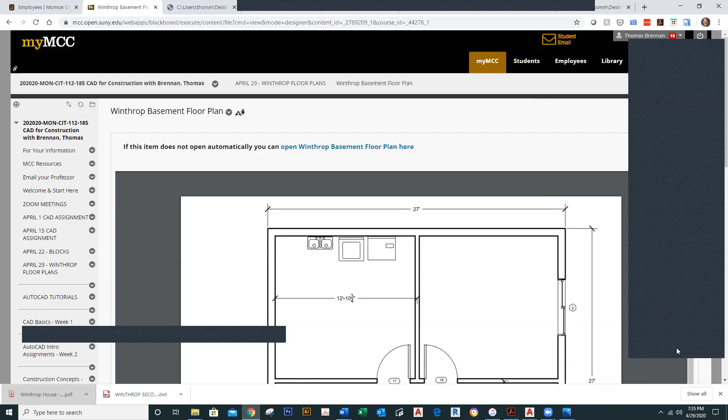I just want to clarify. So we've got this Winthrop assignment that's got to be done, and then you said there was going to be a little final. There's going to be a final the final week. We're going to be doing Winthrop this week and the next two weeks, and then complete it, that's going to be done. Then the last thing is going to be a standalone final. On the last day of class, I'll come in, give you an assignment, you guys will work on it, and then you'll just submit it.

So it's just these last two things we have to do, the final and this. Next week, for this particular assignment, I'm going to have elevations and also a wall section. So you're going to be doing that next week. Then the following week, we're going to put them into title blocks so you could print them and they would actually look correct. From there, that's going to be what you turn in: a complete set of construction documents that will look pretty good, and you'll have a real good idea how to put them together when you're all done.

Okay, the reason I'm asking is I'm behind on a couple assignments, like three or four. I'm trying to figure out if I'm going to have time to get those done and what's coming up taken care of also.

Well, if that's okay, I don't want to take the class time right now to talk about that, but if you want to give me a call offline, we can talk about how you want to prioritize it. I don't know what your schedule is like, but I do take late assignments, so that's not a problem. I'll do my best, I should be able to handle it. I think you can. Once you get into this, just get into it and start to work it, and I think you're going to find you know a lot more than you think you do.